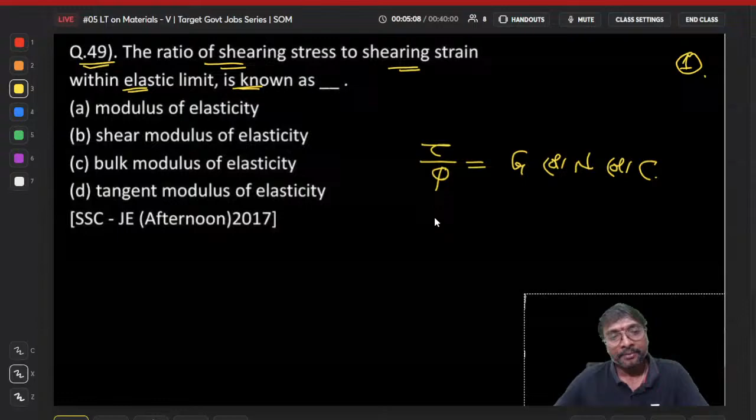The ratio of shearing stress to shearing strain in elastic limit is known as, that is shear stress to shear strain. What is it called? This is called as shear modulus G, or N, or C, you can call it. Now what is normal stress to normal strain called? It is called Young's modulus. And normal stress by volumetric strain is called bulk modulus, isn't it?

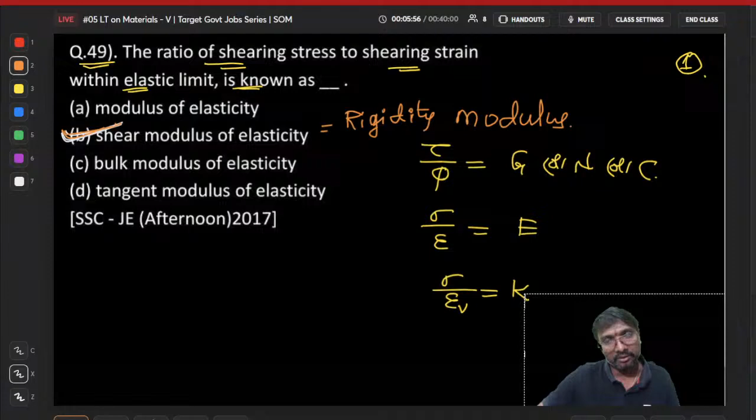So what is this one: shear modulus of elasticity, bulk modulus of elasticity, or tangent modulus of elasticity? What is it called? Shear modulus of elasticity, or you can also call it with which name? Tell me, rigidity modulus, na? It is also called as rigidity modulus, if you just observe. Got it now? It is also called with the name rigidity modulus. Now shall we move on to the next question?

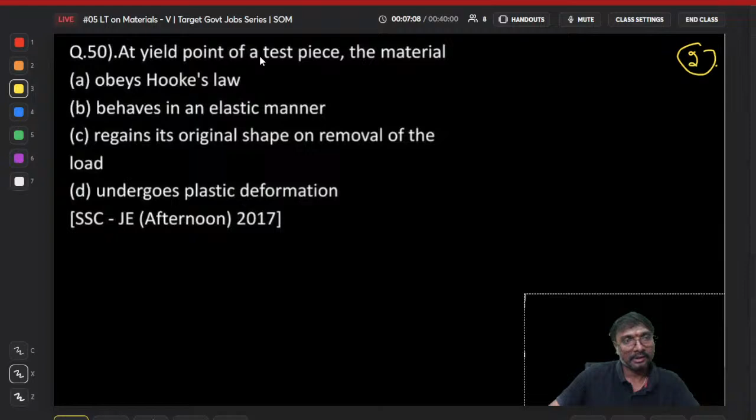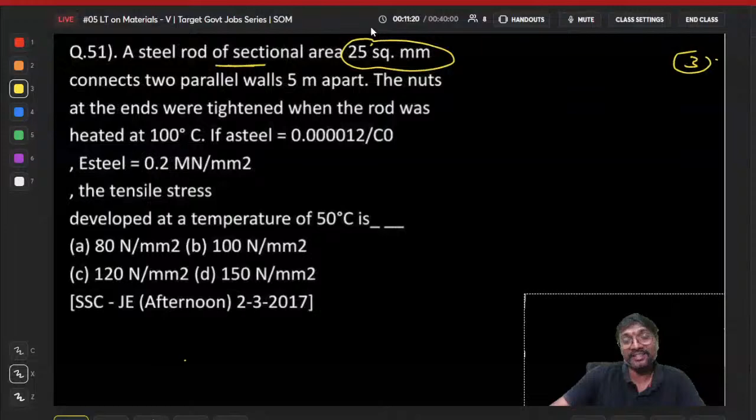A steel rod has a cross section of 25 square millimeters. What is the cross section area? Section means what - the meaning of this section is cross section area only. So A equals 25 millimeter square.

Next, it connects two parallel walls 5 meters apart. So it is connecting these two parallel walls, which are at a distance of 5 meters apart.

What is the distance between them? The steel rod is between two walls at 5 meter distance - it is present like this, if you observe.

Is it clear now up to this point, everyone? All of you?

Now 5 meters apart. The nuts at the end were tightened when the rod was heated at 100 degrees centigrade. So what is the temperature? Originally, the tensile stress developed at the temperature of 50 degrees centigrade, right?

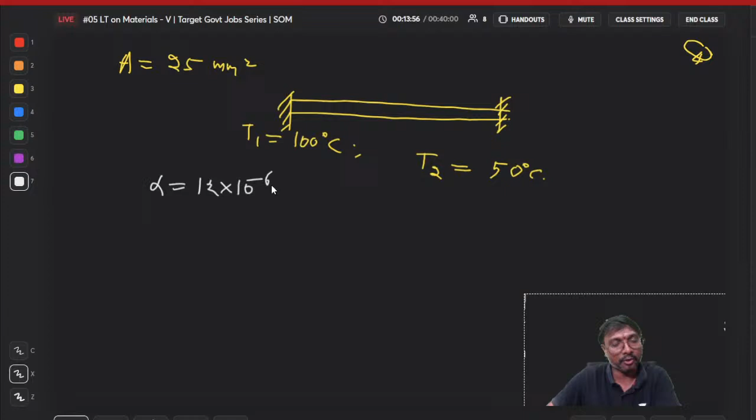If the steel coefficient of thermal expansion, alpha, you can say alpha is equal to 0.000012, got it? So what is that alpha? 12 into how much? That is 12 into 10 power minus 6 per degree centigrade, you can say.

Now what is E of this steel? What is the E of this steel? Young's modulus of this steel. What is the Young's modulus of this steel given?

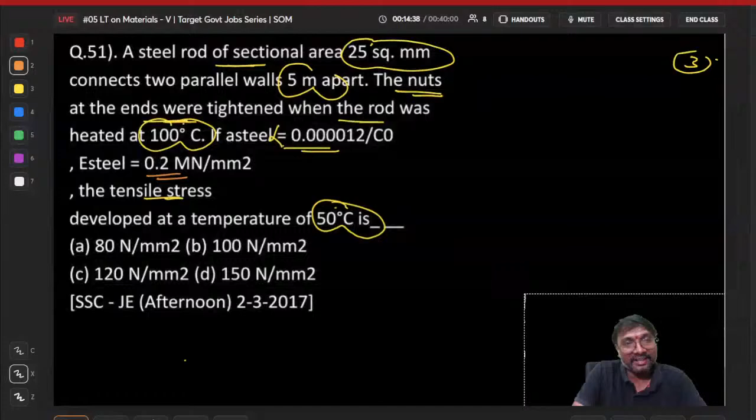It is asked by you. What is the Young's modulus of this steel you are getting? Tell me, it comes to be how much? That is 0.2 mega Newton per millimeter square. Is that correct actually? I think somewhere it is having some mistake in the question, it seems.

Okay, then stress you are asked to identify, temperature stress, right? What is it, ES will be equal to which one? This 0.2 mega Newton per millimeter square means, what is it? 2 into 10 power 5 MPa, I think this is gigaNewton or something. 2 into 10 power 5 MPa it has to be given, actually, you can say, right? 2 into 10 power 5 MPa.

Okay, now what is that stress? Then the tensile stress developed at the temperature of 50 degrees, right? What is the stress? First of all, what is that strain, you can say? Strain, delta L by L, is equal to alpha delta T, isn't it?

Delta L by L is equal to alpha delta T, everyone. And what is that stress, if you just observe? That is strain into Young's modulus.

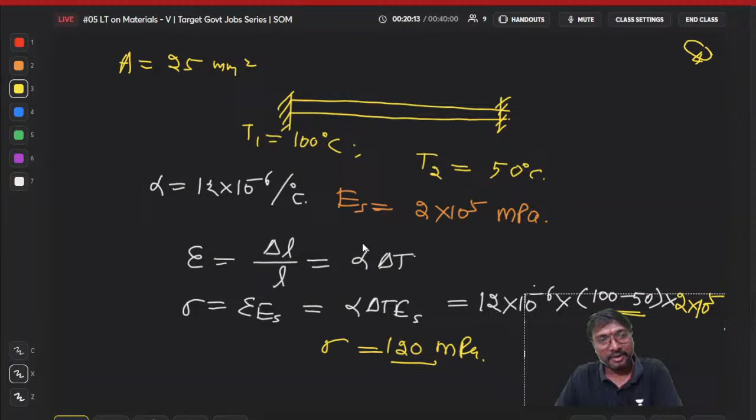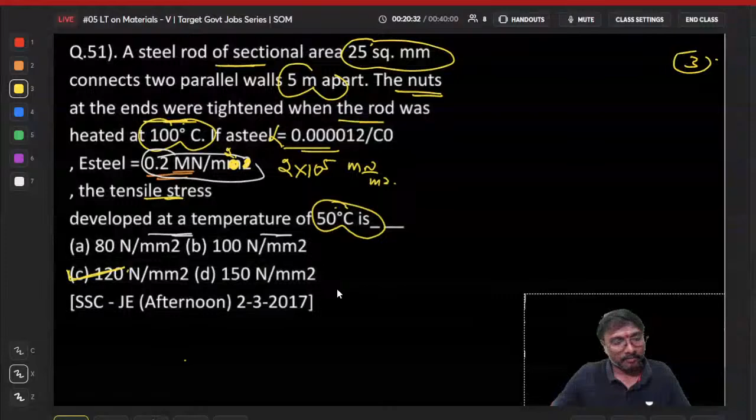Are you saying that, Pawan? Is it so? Are you getting like this? Right, now, actually this is not a first chapter question, right? It is a second chapter question, it will be. So we will be going for that later, in the second chapter. This is question 52, you can take.

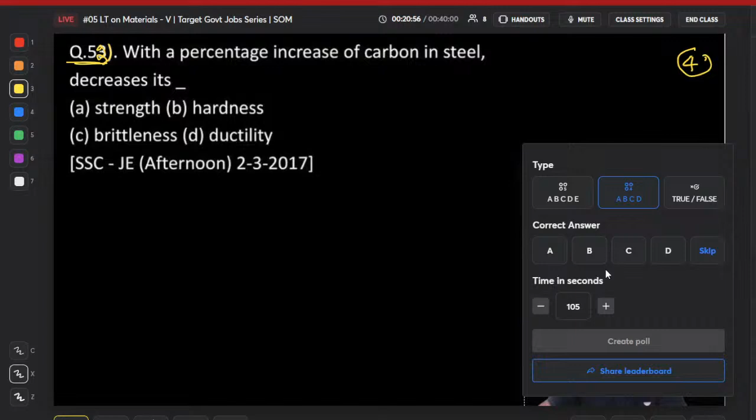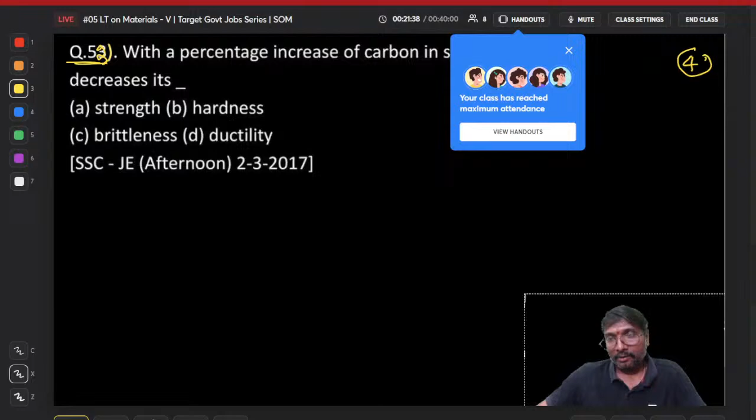Select the answer, 1 second, all of you. Right, so this is a leaderboard, you can say.

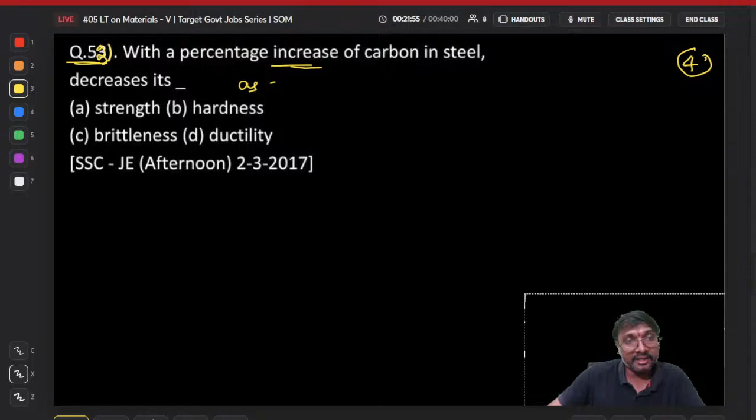Right, now what is that you can say? With the percentage increase in the carbon content, right, what is that you can say? Whenever carbon content increases, right, what happens? Tell me, when the carbon content increases, what will happen? As the carbon content increases, will strength increase or will strength decrease? Tell me everyone.

If you just wrote that strength will be increasing only, na, so strength will be increasing only, you can say, is na? And what about the hardness? If you just observe, strength will be increasing, but hardness also increases, na? Is no? Hardness also increases, you can say, right?

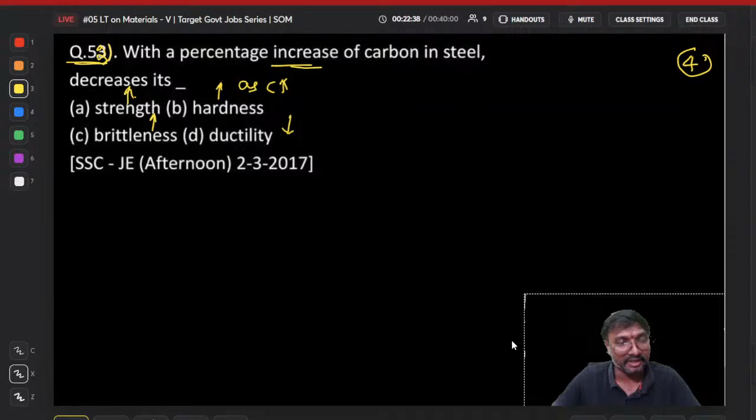Now brittleness also increases, na? Is no? Brittleness also increases, but what decreases, you can say? Ductility decreases, na? So that ductility part will be decreasing automatically, you can say, right? Under this condition, right, as carbon content increases. Yesterday we have seen, na? Is it?

You did not read the full question. Okay, you have to be careful. This is question 53. Actually, this is also, you can say, theories of failure.

What can you say about it now? This question also, okay, we'll discuss. No, actually these belong to different chapters, actually. Okay, these belong to which one? Different chapters, right? Okay, let it be.

So now tell me, is cast iron a brittle material or which material? Tell me, cast iron is a brittle material or which material? If you just observe, cast iron is a brittle material, not a ductile material. Cast iron has how much carbon content? How much carbon content are you having? How much carbon content are you having? So you have to be careful, right? So observe carefully and select the answer.

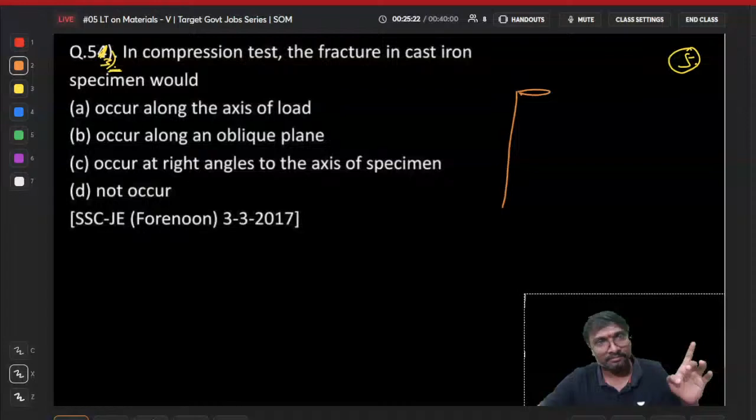Right, is it given wrongly? Right, yes, one sec, what have I given? Okay, one second, okay, this tension test now. Whenever you are having this tension test, you can say, right, for this tension test, what is that you are having? That tension test is applied. This is a ductile material. Okay, tension test is applied to which one?

This ductile material, you can say, right? Tension test on this ductile material. Ductile material is which one? This tension, it is stronger, and compression, it is which one? This moderate, right? Compression, it is your moderate, and this shear, it will be weaker, na? Shear, will it be weaker or not? Tell me.

Shear, it will be weaker, right? Now how it will be failing? It will be subjected to failure in shear. Yes, ductile material under tension - how it will fail? It will fail in the shear, right?

So if you just observe this 45 degree, that cup and cone will form, na? What is the failure plane? At this 45 degrees, that failure plane comes into picture - that is your tension ductile material tension test, right?

Now what is another one you are having? If you just observe this tension test, compression test on this ductile material, right? Whenever it is a compression test on this ductile material, what happens? Whenever you are applying this compression, what is it you can say?

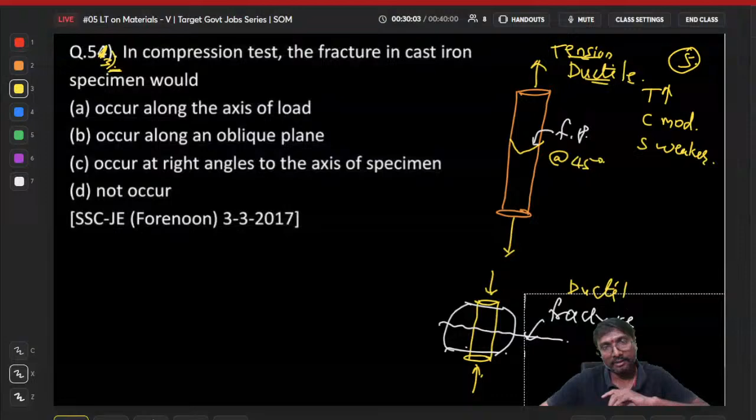This fracture plane, FP means. Now if you are considering, this is also which one? This ductile material only - ductile compression. Ductile material under which load? Compression. Now if you are considering that brittle material, okay...

Whenever you are considering this brittle material, right, what is that brittle material? It is stronger - yes, second one is only the answer, right? It is stronger in which activity? It is brittle material, stronger in this compression or tension? Stronger, weaker, and moderate - in which one? Tell me.

Brittle material is stronger in which one? This compression. Brittle material is stronger in compression. So moderate in which one? Tell me. Weak in tension. They are weaker in tension, and moderate in this shear, right? Moderate in this shear. No, Shruti, it is not.

Because it is ductile material, but in the question it is asked as cast iron. Is cast iron a ductile material or is it a brittle material? That is your brittle material. That is your ductile material or that is a brittle material? That is a brittle material.

Okay, now here fourth image, right? Whatever I am going to draw, fourth image, correct. So here brittle material under tension. We will say brittle material under this tension, if you just consider it, na?

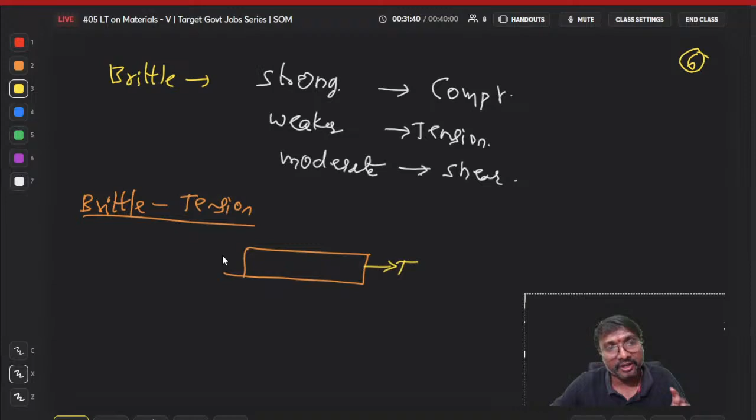Yeah, it is okay now? Now tell me, is it weaker in the tension or stronger in the tension? It is weaker in the tension only, automatically.

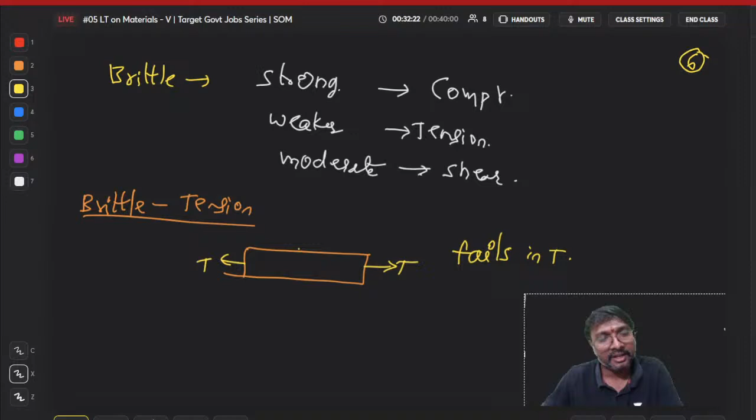When it is weaker in tension, it will fail in tension, so it cannot fail in compression. So it will fail in which one? This is tension only, right? Fails in tension means, so this is at 90 degrees to this tension load, at 90 degrees to this tension load, you can say, right?

Got it? Now, whenever it is a brittle material under this compression. Brittle material under this compression, and whenever this brittle material is under compression, if you just observe, what is that? You can say this is compression you are having.

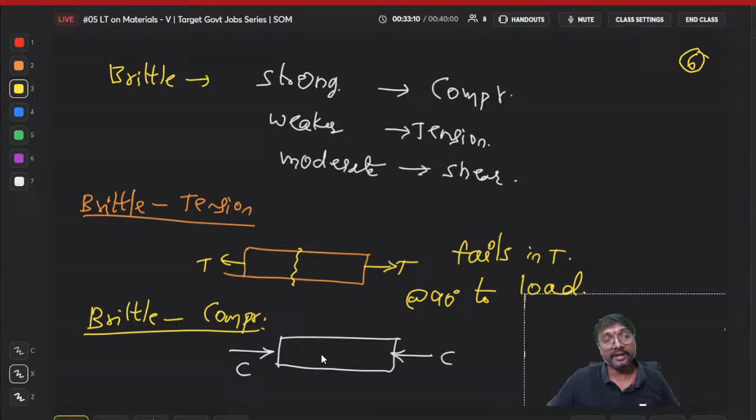Now tell me, is it stronger in compression or weaker in compression? It is stronger in compression, you can say. Whenever it is stronger in compression, what is it? If you just observe, it is stronger in compression means failure in compression will not happen, right?

Next, is there any tension coming or no tension comes? Tell me. If you just observe, no tension comes. So then what is another possibility of failure? Moderate failure, so compression it will not fail because it is stronger. Next weakest point is what? Tension is not coming there, so therefore moderate shear only will come into picture.

At which angle? Tell me. At this 45 degrees to this load. At 45 degrees to this load axis, right, like that. Is that clear now, everyone?

Ductile material tension compression, brittle material tension compression, and how the failures are happening. Right, clear now, everyone? Ductile material tension compression, brittle material tension compression, how the failure plane is happening, is that clear?

Now for this question, what is the answer? Tell me, everyone. In the compression test, the fracture in the brittle material, that is cast iron specimen, will it be occurring along the axis? Along the axis it will not happen. Will it happen along the axis? No, no failure will occur along the axis, right? That is by mistake given in the key.

Okay, don't worry, the key is given by mistake, you can say. It should occur along the oblique plane perpendicular to the specimen. When will it occur perpendicular to the specimen? Whenever it is tension, it will occur - this is corresponding to this tension occurrence. This is corresponding to which one? This is a compression occurrence.

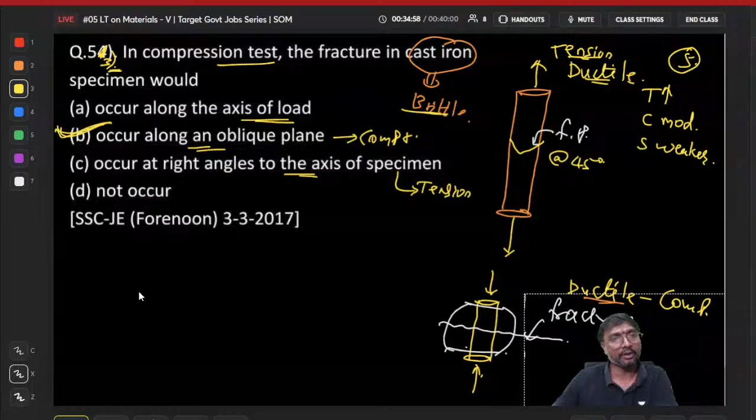Yeah, Pavan, tell me. Yeah, B is the answer. Yes.

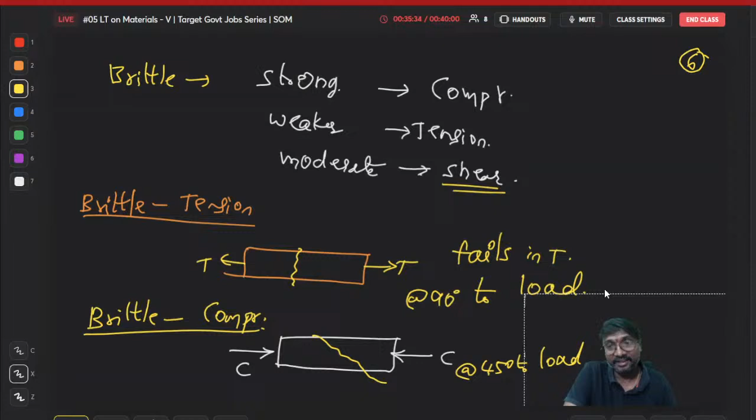Hurry, I forgot again. Okay, I'll read it. I forgot really, so I'll just, okay, reply to you. Don't worry. Thank you.